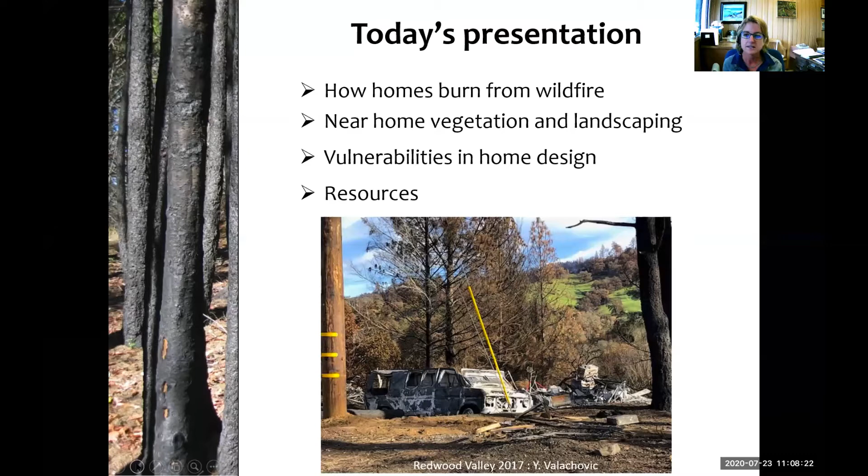There's a lot to this, but what I hope really to do is start that conversation with you and your family about the actionable items that you can take on and the pieces that are achievable and where to move forward. All right, so to get there, I need to sort of distill a couple of terms, and these are going to be like the biggest vocabulary terms that you have in this seminar.

Fire comes to a home in 3 different ways, and we need to think about them in distinct formats, or distinct exposures, so that we can try and best mitigate the exposure that they present. I think most of us are familiar with the idea that there's a wildland fire that burns from the landscape to my home, and that provides direct flame contact where the flames actually come all the way to the house.

Some of you may be thinking about this idea that wind-distributed and driven fires have embers or burning bits of vegetation or your neighbor's home that can be picked up in the air column and moved forward. So taking that wildland setting where you have a fire in the forest and the wind is carrying bits of vegetation already engaged in fire, and those land on the house — embers are another piece that we have to be thinking about when we're thinking about wildfire preparedness.

The third component is radiant heat, and that is where the fire never actually touches your house, but the heat from the surrounding vegetation or your garage or your outbuilding reaches a high enough temperature that you can cause combustion on your home. So all 3 issues are really paramount when we think about how to protect our homes to the best of our abilities.

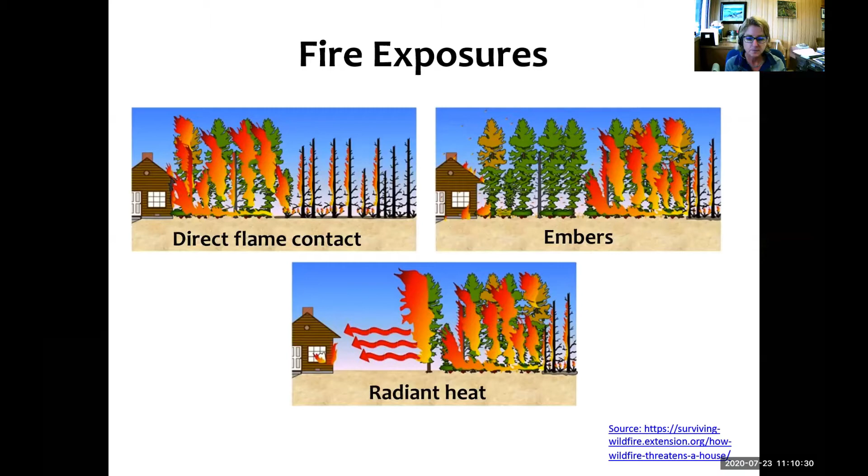Reorienting towards the type of exposures that you might see with embers is a bit challenging, but we know some new information about them, and we've got some new building materials and design concepts that can both mitigate existing construction or be better incorporated into new construction.

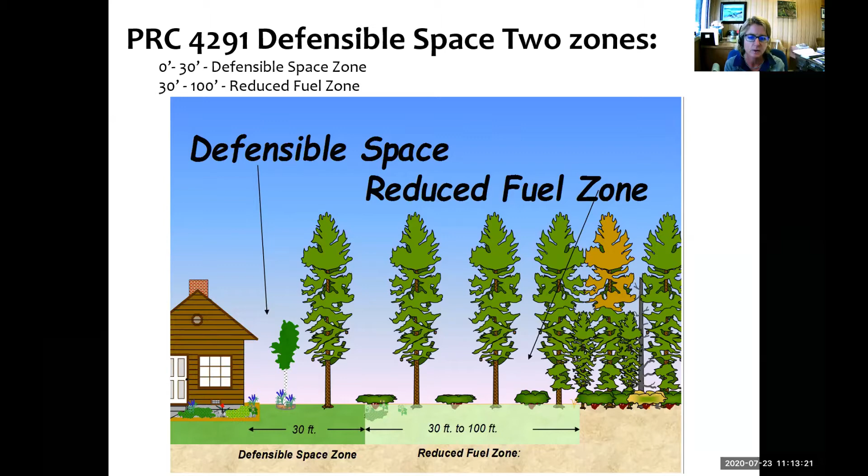So there are two zones: 0 to 30, and then a 30 to 100 foot additional fuel reduction zone. This is California law, and there's a lot to this, but the idea is you need to think about where your home is placed and the spacing between trees, shrubs, and vegetation in general, which increases when we talk about steeper slopes, taller vegetation, or particularly fire-prone ecosystems.

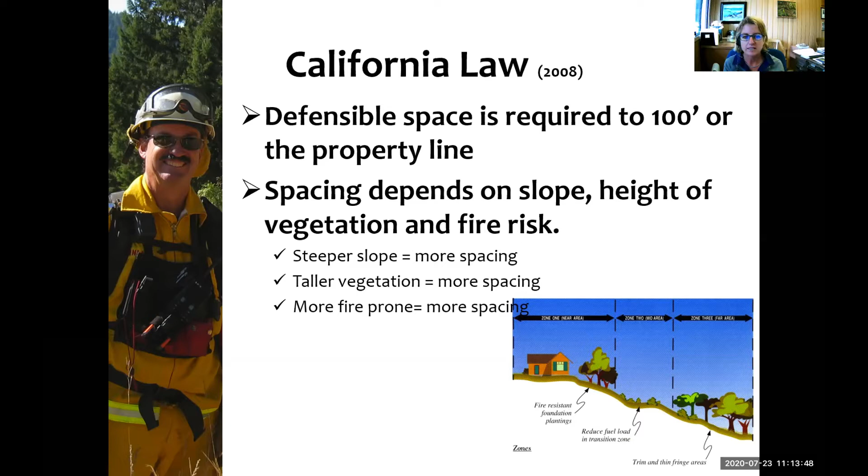I'm not going to go into great detail, but this is where we've been at with our typical defensible space education. The idea is you're reducing the amount of vegetation so you can interrupt the fire. If you have fire in the green parts of the trees or the crowns, the fire may lay down and more gently come across the landscape as it approaches the building.

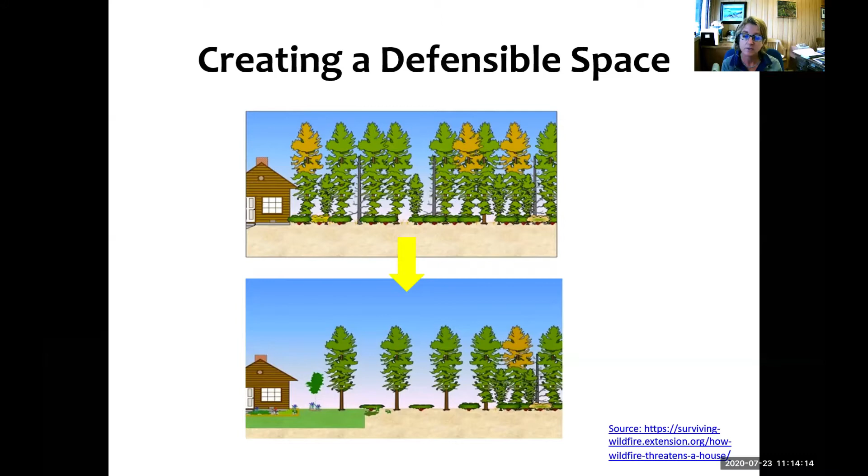The flame lengths will be appropriately reduced when that happens, so it's possible to respond to that fire. The goal in that style of defensible space is to reduce direct flame contact and create basically a safe place for the fire crews.

What I want to say is it's really more defendable space than defensible space. The idea that you can safely put a fire truck, a fire engine, and a set of crew to be able to defend your home is really the strategy we think about when it comes to the type of defensible space education we've done.

So the fire comes out of the forest and the crowns of the trees, the green part of the trees, and comes down to the ground, and the flame lengths are reduced, and it's possible to do direct attack. That works for a lot of the fires that we experience.

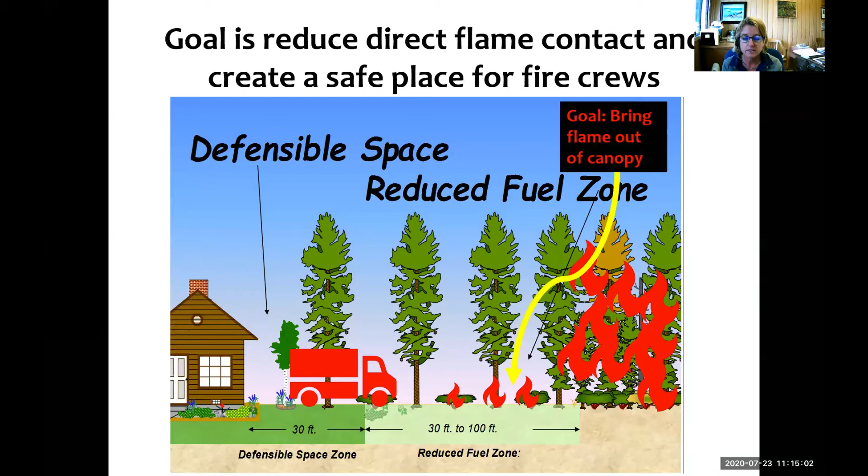But when I first laid out, we have to be prepared for direct flame contact. We also need to be prepared for those embers, and we also need to be prepared for the radiant heat exposure. So in that model, does that cover all of what we need to do?

I'm going to argue that it doesn't, because ember defense requires both landscaping modifications and home hardening, and embers can easily overwhelm that typical defensible space strategy we take on. They can pass over that, just like they can pass over the 8-lane freeway in Santa Rosa and move from one side of the freeway to the other.

Embers are very successful at moving, even up to a mile or more. Depending on what they find, both on the house or near the house, they can create new fires that will create direct flame contact to the house, penetrate the house, or even create an exposure through radiant heat because they connect with a close outbuilding on fire. So thinking about embers requires that we change how we think about defensible space.

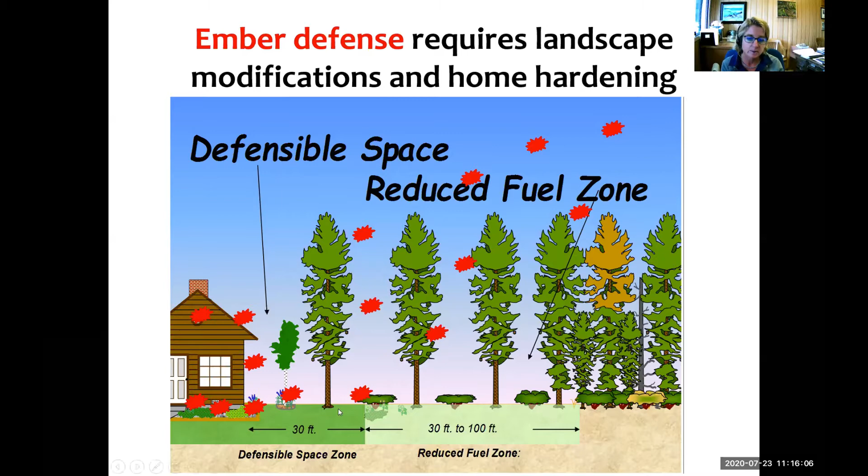So how do we balance all of our aesthetic interests, our privacy interests? How do we think about this? What you're going to see, at least in our shop within the University of California, is a reorientation towards working from the house outwards. The problem is not one of my neighbors, it's not one of the wildland as much as it is about what can we do right next to the house. Once we've accomplished that, then how do we push out into the farther territory around the house or to the property line.

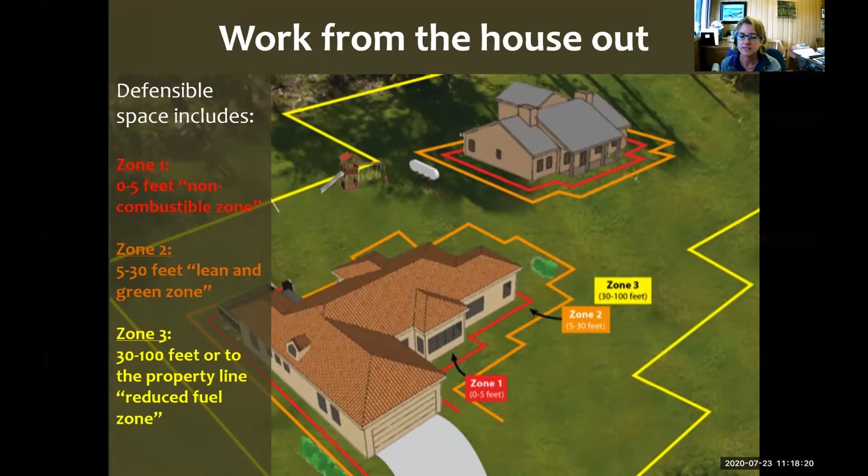So we're talking now about a 3-zone system, more than we have in California before. The names are going to change a little bit. We're working on some code changes that will lead to some of this, but the new concept is that in the zone right next to the house, out 5 feet, is some of the most important area that is going to contribute to the survival of your house. So what can we do in that place? And then we'll continue with the fuel modifications and the lean and green zone and the modified fuel zones as we have, but we need to incorporate this idea about what we can do right next to the house and how that's going to prepare us to be able to defend the house against embers.

So here's an example from Marin County. They've done a nice new graphic illustration of this multi-zone concept, and you'll see that it includes any attachments—the attached stairs, the attached deck. So this zone is the entire perimeter around the house. And then there's the typical 0 to 30-foot zone, and then 30 to 100-foot zone.

I will say what Marin's doing very nicely in their education work is they're also thinking about an access zone, and that is the access zone for fire personnel to be able to get in safely and effectively. They want to make sure that your house is one that they want to defend. So if you're down a long driveway with lots of overgrown vegetation, they might not risk their own personal lives and safety to go down to your home. So that access zone is really important for them getting in. But even more importantly, it's for you and your family to be able to get out. So the house plus the access zone and then the surrounding vegetation.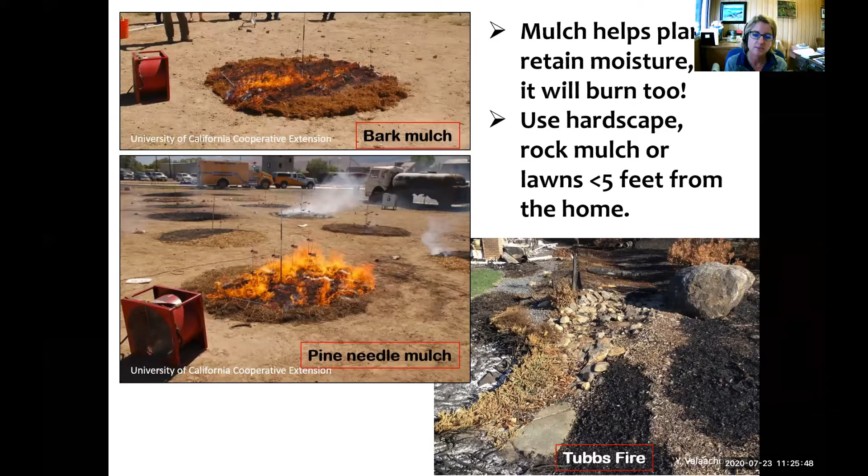Now, I know there's a lot of interest in fire-resistant plants, and we all want to buy something that's marketed towards us to meet our needs. I just want to share that all plants can burn regardless of how they're marketed. It really depends on how they're maintained. Do they have proper irrigation? Do they get pruned? Do cleanup activities happen over time? All those functions have to be maintained regardless of how the plant is marketed. There's been a lot of research into the difficulty with plant lists and the challenge with it.

We can take lavender, for example. I might plant lavender one year. It's very lush, non-woody, but the plant characteristics change through time, don't they? Because it gets woody over time. I might not be good at watering it, pruning it, or doing annual fall cleanup. Before I know it, I've got a pretty dry, dead plant with a few flowers and bits of green, and it went from being lush and non-woody to suddenly quite susceptible to fire.

So when we're thinking about plant lists, our recommendations are really to focus more on the plant attributes and where it's going to be planted, so that you can maintain it to the best of your abilities. Now, I know a lot of folks are interested in native and drought-tolerant plants, and they're great for those reasons, but they don't necessarily lend themselves to be any more fire-resistant than any other.

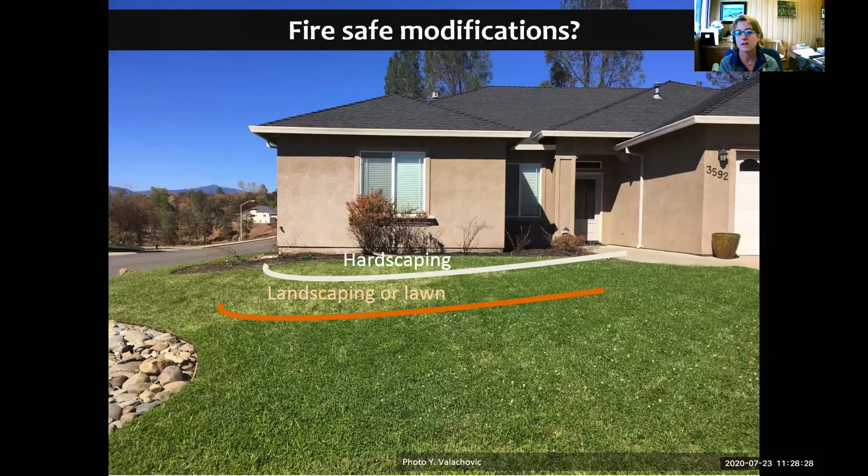So it's kind of flip-flopping what we've been doing. We often put the landscaping next to the house and then put the walkway on the outside of it. Well, if we can put the walkway closer to the house and landscaping on the outside, we've made a huge advancement when it comes to fire and fire performance.

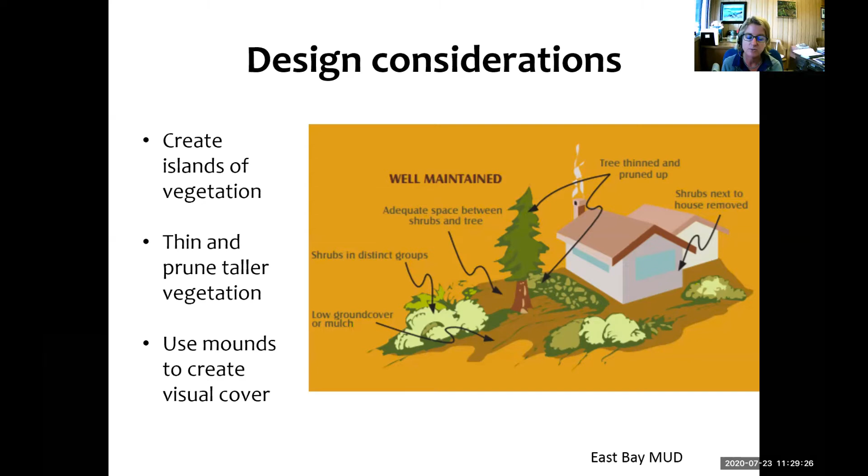So let's talk about the vulnerabilities in the house, because the two pieces are very complementary to each other, and there are things we can do that can accentuate the vulnerabilities in the house by our landscaping, and then there are other things we can think about here. I'm mostly going to, in this frame, talk about direct flame contact and ember exposure. The radiant heat piece is super important, but I'm going to try and pick that up at the end. I'm only going to scratch the surface today on the issues.

Now, the information I'm going to share with you comes through two forms. One is through post-evaluations of fires. I've been on a number of them now in the last couple of years, as well as a research laboratory that's managed by the Insurance Institute for Business and Home Safety in South Carolina. They have a laboratory big enough that they can build buildings and then expose them to different types of flames or embers, and then be able to evaluate how each component does under this exposed environment.

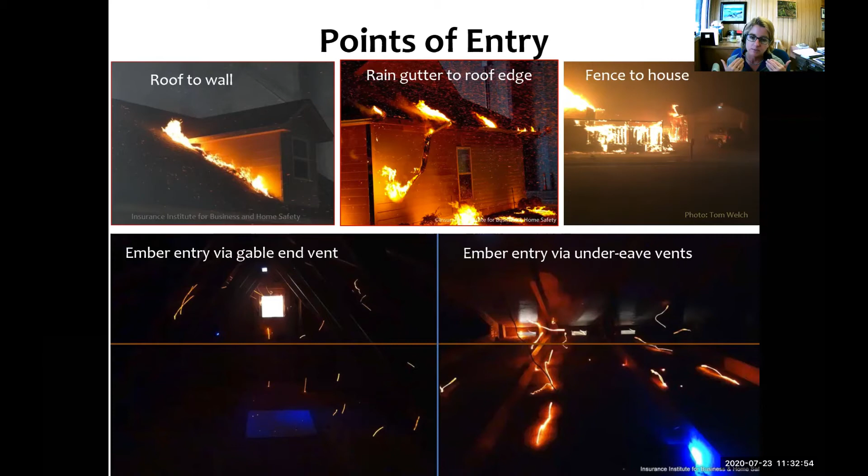So those are a lot of concepts, a lot of things to think about. What I want to do is help you decouple some of these issues. Our host, Sherida Phibbs, will send a short guide at the end of this, so you can start to think about some of the issues yourselves.

But when it comes to prioritizing actions around structure survival from wildfire, there are different categories and different issues. The number one issue really is your roof and your roof edge. I've been struggling as a homeowner myself. I have a 65-year-old house, and until this fall, I had an original redwood shake roof on it. So I had a lot of issues, and it wasn't worth me working on these other issues until I dealt with my roof. It was an expensive proposition. I knew that, and so it's taken me a while. But recognize that your roof is the biggest determinant of your survival in many ways.

Then the vents, and we'll talk about those in a little more detail, and then the vegetation and defensible space. This is because all three of those are vulnerable to embers. Now, windows, decks, and siding are also important, slightly lower down on the priority list, because all three of those are vulnerable to embers, radiant heat, or direct flame contact. And those can be mitigated through some other actions.

They become more or less important in a number of scenarios, though, so I will say if you're on steep slopes, there's some additional issues, or if your homes are really close to each other, there's some additional issues. So the prioritization process shifts around a little bit depending on your setting, and I won't have enough time today to really go through that in detail, but just recognize that your setting may be unique, and there may be another way to reshuffle this prioritization process based on this. But no matter what, your roof, your vents, and your vegetation are always going to be a high priority in any situation, even if your home is way out by itself or if it's even in a dense neighborhood.

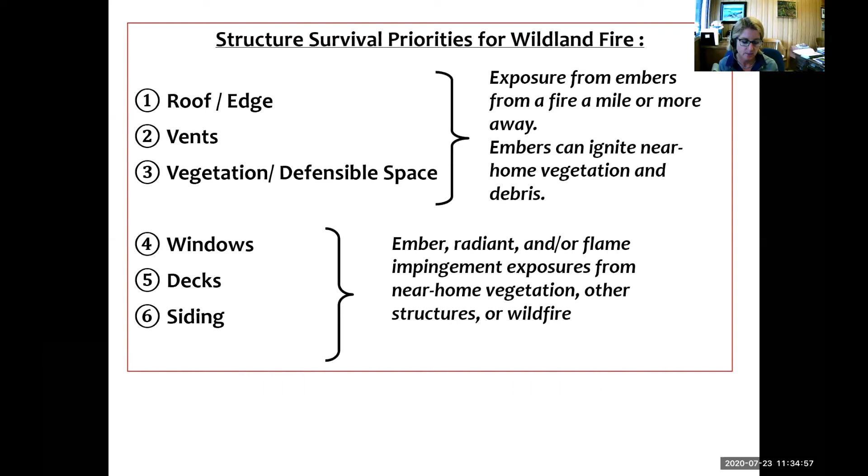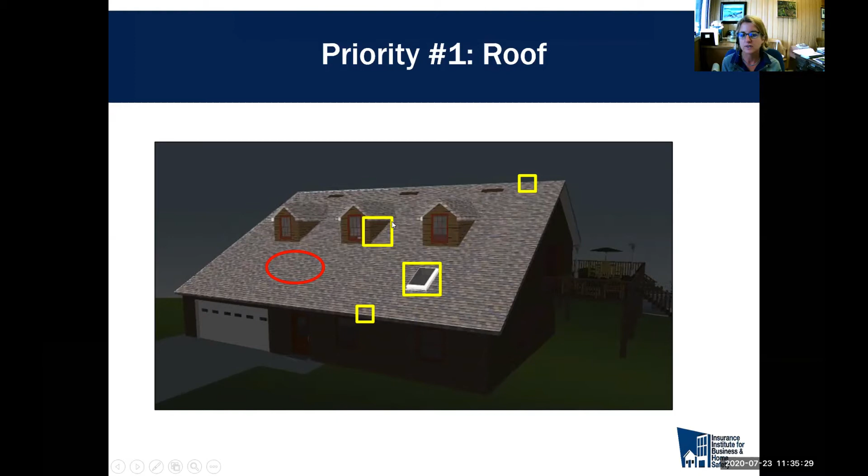So why the roof? Well, the roof is the largest horizontal surface on your building, and your roof has to do an amazing job of keeping the sun out, keeping snow out, maybe dealing with copious amounts of rain, maybe even hail. But the fire rating of your roof is only the roof deck itself. It doesn't relate to penetrations such as skylights or vents, or the complexities of roof intersections with walls. So there's some more to it when it comes to the roof.

Really what we're trying to get people to think about is, where are the weak points? They're often at the roof edge where there can be little gaps. These are two tile roof examples where you can see there's some gaps, and you can envision it wouldn't be that hard for vegetation to get stuffed in there, or birds to move vegetation in there, and then embers to follow. And then you've got fire underneath your roof.

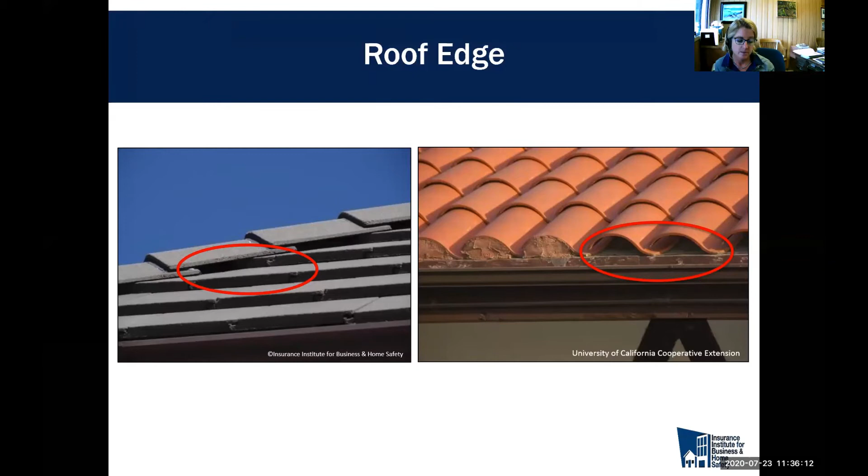The formal term for this terracotta tile roof feature is bird stops. So it is a real thing that animals will bring little homes to these openings. So the roof needs to be in good shape to provide that important defense for you.

And if you're building from scratch, the more simple your roof lines are, hey, there's much less maintenance that needs to be managed. But you can also basically design some additional robustness into this from the beginning as well.

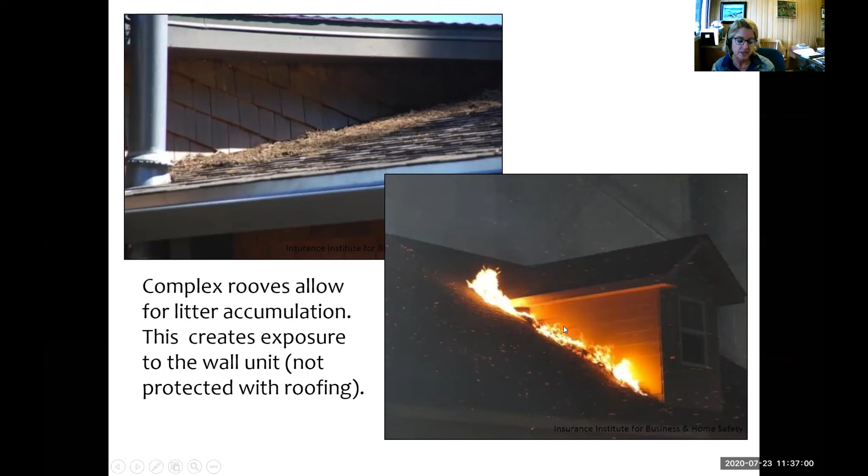So number 2, the vents. Vents are really important because what they do is they allow the warm, moist air that gets into your house and penetrates through your ceiling to have a pathway out. It also lets cool air come in, so there's a whole circulation pattern with vents, so vents are very important.

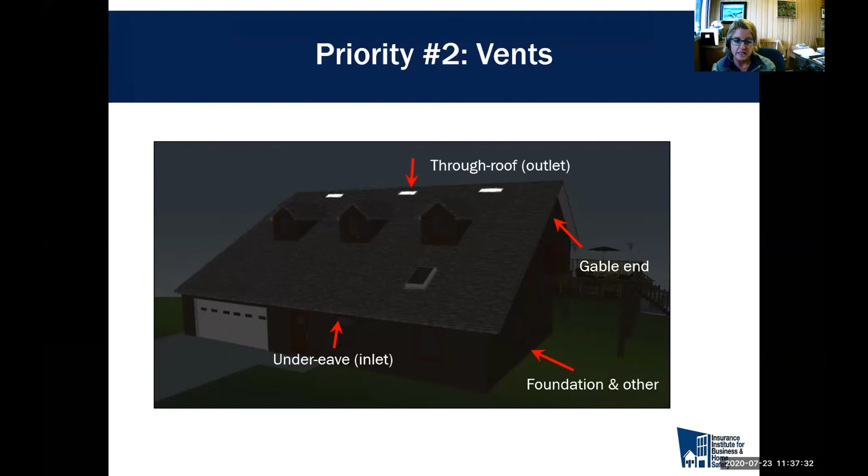But what we're trying to get people to do is get vents that have become more like Gore-Tex, where they let that warm moisture out, like in your coat, but then they keep the rain and the snow from coming in. And so the neat part is that there's been some new vent designs and some new modifications that can be retrofitted in or designed in from scratch.

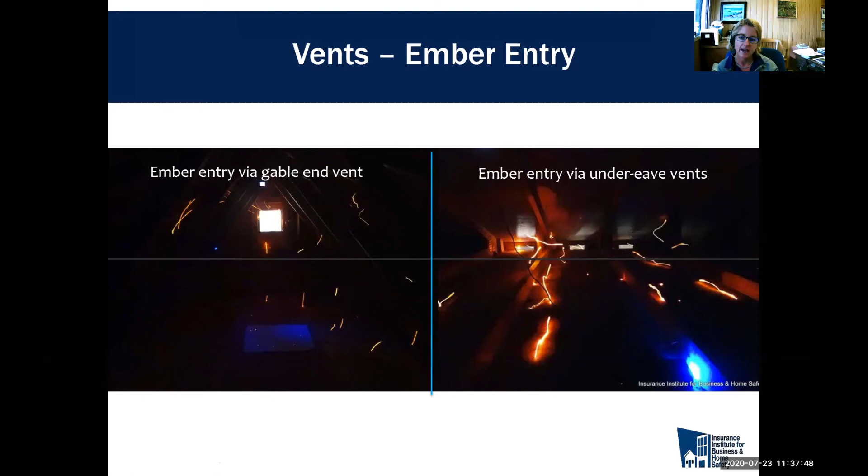So I showed you this image earlier, and what we're trying to create is a way to protect the inside of the house from penetration by embers through these vents.

So the majority of our homes are built with 1/4-inch mesh, which is pretty porous, which is good because it's not easy to fill with paint when spraying your house. You can clog up something that's a little tighter, so we need to be careful about not clogging up a tighter screened mesh.

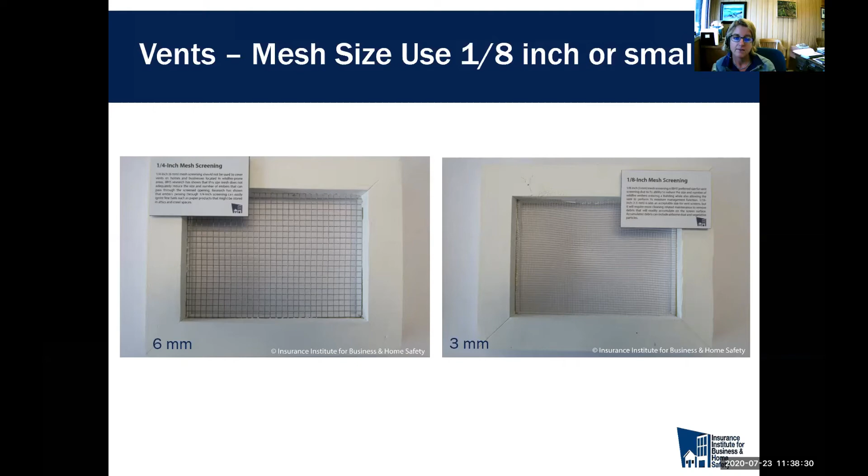But if you manage to remove the vegetation and things that can ignite right next to the house and right next to the vents, a real simple solution is to upgrade to 1/8-inch mesh screening. That can be done over the top of the existing 1/4-inch mesh screening. So a combination — a very low cost retrofit, assuming you are not going to have flame penetration of those vents.

If that's not possible, or there are more complexities, there are new design vents that basically will both resist embers as well as resist flame penetration. The one on top has a honeycomb mesh that, when heated, actually melts and seals up. The one in the middle, this baffle design, is sort of a tortuous path, so the embers will bounce around but don't penetrate all the way through.

There's also steel wool mesh used in these through-roof vents. So there are some new designs.

This vent costs about $25. It's a foundation vent, so depending on how big your structure is, you can use that to estimate what it would cost to do a vent upgrade. This gable end vent — both of these are in the like $120 range. So for a small cabin, probably not a huge financial investment.

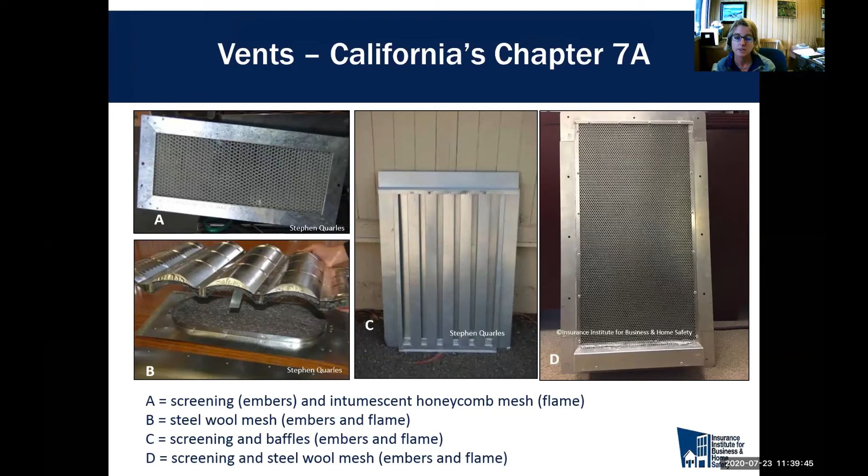For a larger, more complex house, the costs increase, and it really depends on how much you can control and how much risk you can manage. If you're building new, this is the kind of vents you'll be required to install if you're in a wildland urban interface zone, not in a municipal city setting, but there are some opportunities.

Decks. I'm a lover of redwood, I'm a lover of decks, I like to be outside. Many of us have decks. They are vulnerable both to direct flame contact as well as embers, depending on what's on them.

So if you're in a position where you're going to be upgrading a deck, I want to put a message out that there's some new guidance around how to build decks that will benefit you. It's really about items like putting a non-combustible deck board adjacent to the siding, using a foil-faced bitumen tape on the deck joists, increasing the gaps between boards to 1/4 inch, and building in 24 inches on center. A little harder to retrofit, but if it's time to upgrade your deck, these are things to think about for new construction.

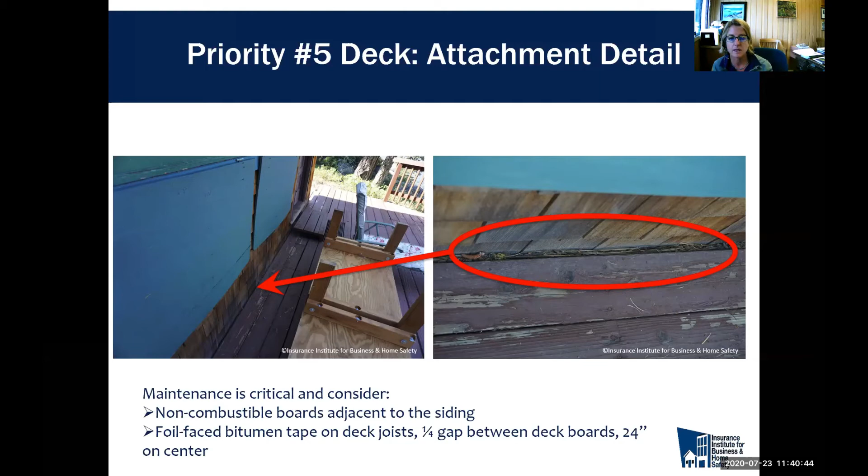The number one issue with decks, though, is to remove the combustible materials from underneath the deck. I know it's very tempting — all of us want to store materials underneath our decks, out of sight, out of mind, or for a little protection from the elements. But if that catches on fire, and it catches your deck on fire, it's pretty hard to protect your home in that setting.

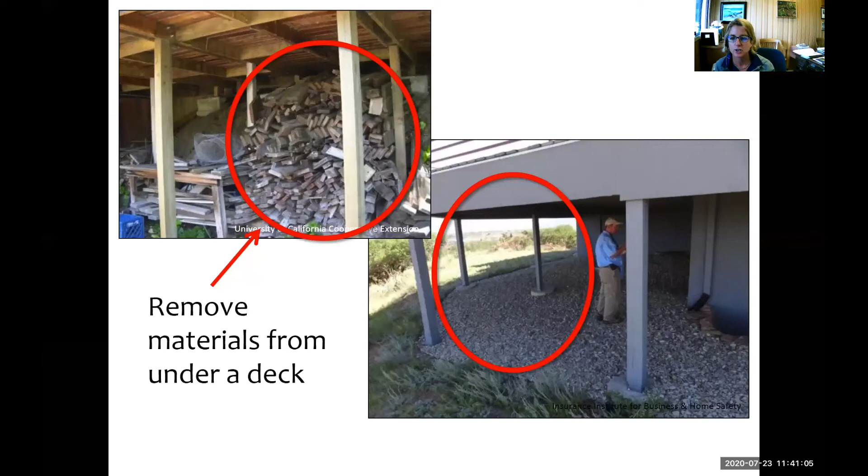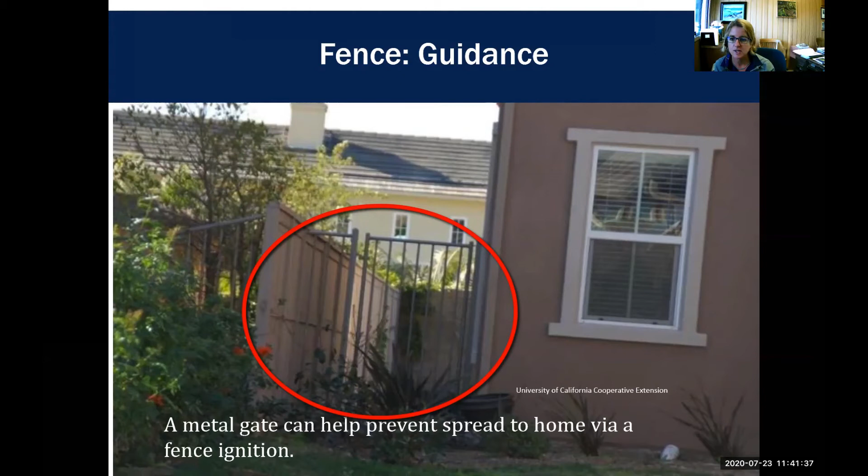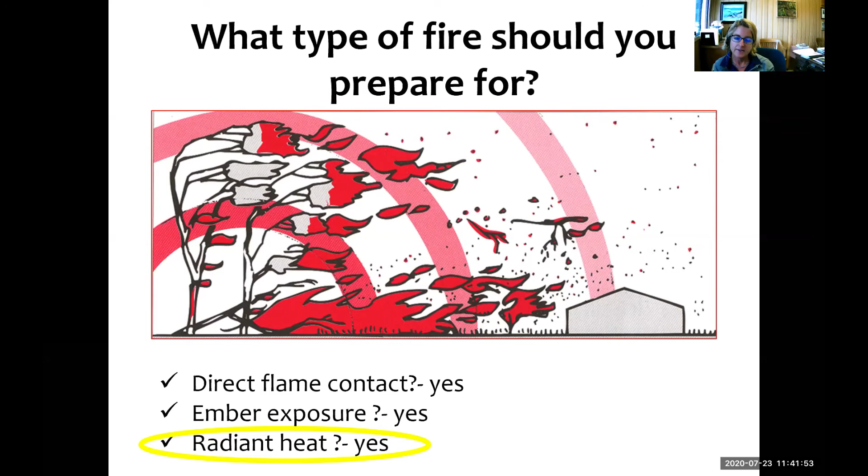So that's just some high-level ideas. Hopefully I've scratched some of your thinking process around the types of exposures, and there's a lot more to how to mitigate those. But as you think about risk, there are things that you can do.

So radiant heat — I'm not going to spend a lot of time on this — is really difficult if your homes are close to each other. Your neighbor's condition can have a huge determinant on your own survival. So when you live in tight neighborhoods, there definitely is a need for people to work together.

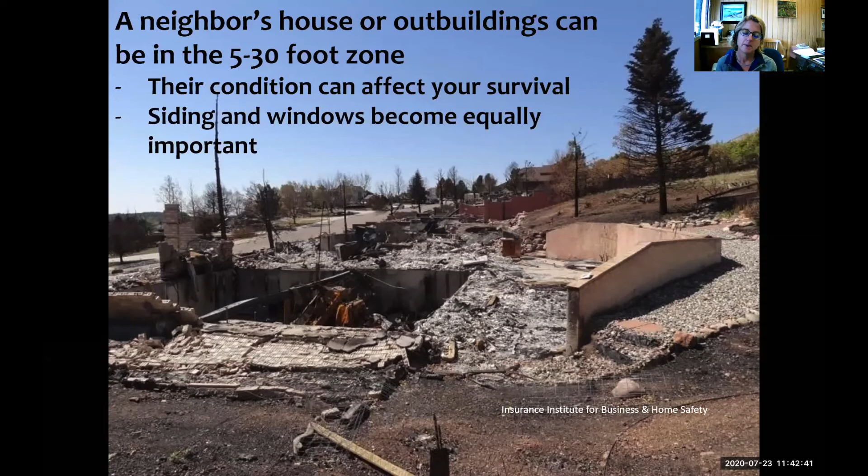There are some ways to increase wall resistance to heat from that radiant heat component, and ways to upgrade windows to tempered glass. There's also deployable metal shutters that you can close if you're in an evacuation. So there are things you can do in these tight neighborhood settings, but the best thing to start with is figuring out how to work together.

So as I conclude, and I can see there's a lot of questions here, let me bring it back home. The question is, what are we waiting for? Why is it that we haven't done the actions we know are important? For me, it was, hey, I had to refinance my house to replace my roof, and I get it — some of this stuff is very expensive. Some of it isn't.

I think part of it is related to this idea that we have a fighting force, for example. Why is it that we have a force specifically designed to protect us with a term that we know they can't do in all times? We don't fight earthquakes, we don't fight tornadoes, we don't fight hurricanes. What do we do in those settings? Well, we adapt and we build smarter, right? So when it comes to fire, I feel like we've kind of been stuck in this mode that there's always going to be someone in uniform, or someone volunteering in uniform, who's going to come and risk their lives to help us. And so maybe there are things that we can do to help them help us.

So how do we shift that mentality to think about what's within our responsibility line that we can have control over? I don't know what that answer is for you, but these are the kinds of things I'm working on. I'm really trying to reorient my perspective to recognize that these embers are the issue that I really need to prioritize, and I haven't been paying attention to.

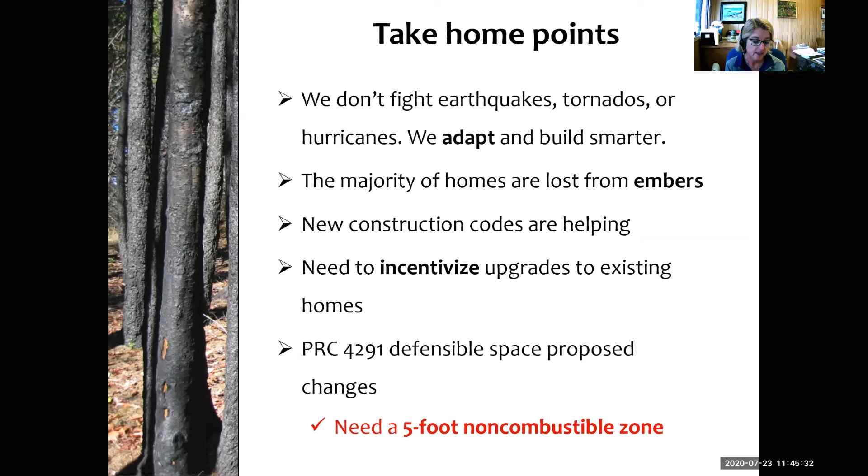You're going to see through time that there's going to be some new changes, and the Defensible Space Code is likely to change to really incorporate this 5-foot zone, whether we call it Zone 0, the Ember Defense Zone, or the non-combustible zone. We can take it on voluntarily, or code and regulation will change and encourage us to do that in a more regulatory framework. So things to start to pay attention to.

And as I conclude, I think it's possible to have beauty, safety, privacy, and resistance to drought and all of those things. It's about the right plant in the right place.

And then when it comes to the home, the design, maintenance and construction is really more important than any particular fire-resistant building product. It's about all the little details, and poor installation or a lack of maintenance can fundamentally overwhelm any building product, no matter how it's rated.

So thinking in a systems viewpoint, thinking about the type of exposures you're likely to have and preparing for those requires this kind of integrated, complementary strategy between the landscaping and the home, and the home and the landscaping conversely.

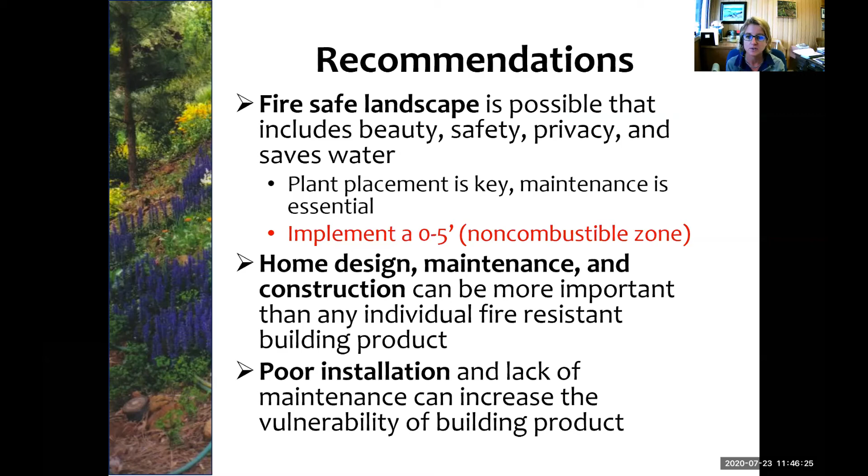So as I conclude here, I've got a number of resources and websites to look at, and there's a lot to this. We're trying to really push out and build more fluency in the general population around these terms. So you'll see more websites that start to get at these materials. There's some at our shop, University of California.

The Insurance Institute for Business and Home Safety has really powerful videos to help share this information with your neighbors and family members. The Disaster Safety website can link you into some of those videos. The National Fire Protection Association has a great number of fact sheets on individual components and how to think about mitigations for those components.

And then if you're interested in new construction and you want to know what the standards are, here are the links to the California new code for the Wildland Urban Interface, the WUI Chapter 7A construction standards, and where you can see how different products perform and what's approved.

So there's no silver bullet out there, but I think together we can start to rethink resiliency with fire, and about the fact that fire is part of this landscape. California adapted as an ecosystem to many different types of fire exposures, and now we've just sort of interrupted that process by putting our homes in it and trying to control as many fires as possible, which has been good for us in the past. It may not be so good for us going forward.